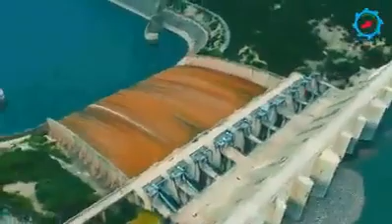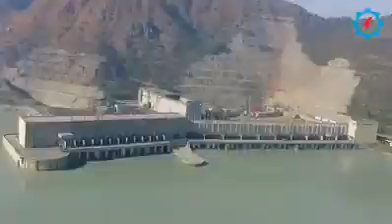Dam significance is imperative for the prosperity of Pakistan and to fulfill the water requirements for agriculture and power. Tarbela and Mangla multi-purpose mega projects sustain Pakistan's agriculture economy by supplementing and regulating irrigation supplies and providing cheap energy to the country. Since Pakistan has started the construction of Mohmand Dam and announced to commence the Diamer Basha Dam, on completion, thousands of megawatts and millions of acre-feet of water storage will be available.

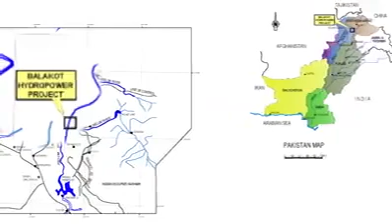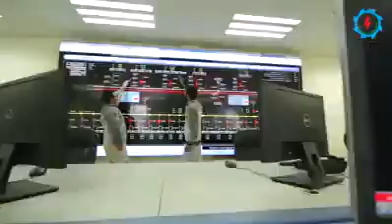However, the cascading hydropower projects are also playing a vital role to mitigate the shortfall of electricity in the country, and Balakot HPP is one of the cascading hydropower projects ready for construction. The 300 megawatt Balakot hydropower project is one of the series of hydropower projects on Kunhar River launched by Pakhtunkhwa Energy Development Organization, Government of Khyber Pakhtunkhwa. The objective of the proposed hydropower scheme is to generate and add cheap energy to the system in order to meet the current shortfall and increasing demand of electricity in the region through economical and sustainable means.

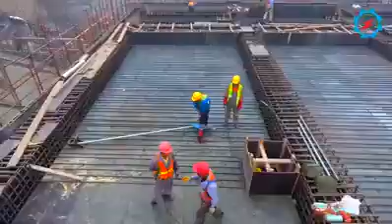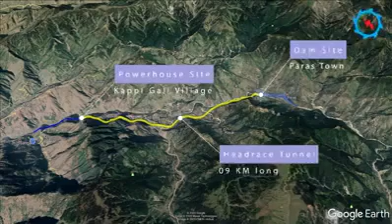Balakot hydropower project is located on the Kunhar River, about 18.6 kilometers upstream of the town of Balakot in KPK province. The project is expanded over 12 kilometers from Paras to Sangar village. The dam site will be located near the village of Paras, whereas the powerhouse site will be located 8 kilometers upstream of Balakot, near Kappi Gali village.

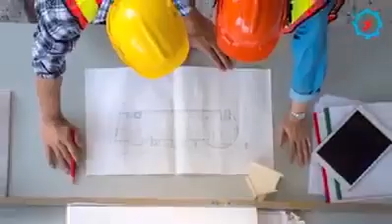The run-of-river scheme was originally identified under the Study Identification of Hydropower Potential in Kagan Valley by the Sarhad Hydel Development Organization, now called PEDO, with the technical collaboration of the German Agency for Technical Cooperation, GTZ. A feasibility study of the project was prepared in 2013 and updated recently by reputed consultants. The joint venture comprises Aqualogus from Portugal, Team Consultants and Zeeruk International from Pakistan. The consultants released a draft report of their findings in 2018. Hagler Bailly Pakistan Private Limited contributed to the environmental and social assessment of options for ensuring that the project meets the environmental and social safeguards.

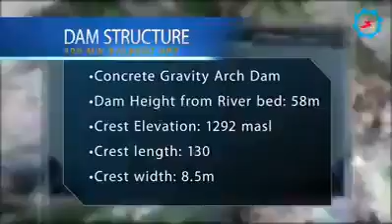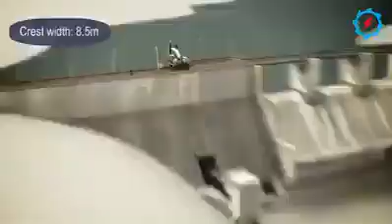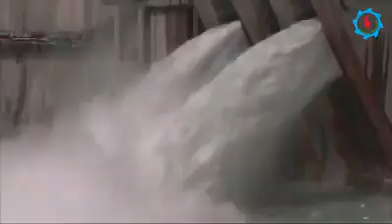The 58 meters high dam structure is concrete gravity with a curved axis in plan and a radius of 187 meters. The dam crest elevation is 1292 meters above sea level and the crest length is approximately 130 meters. A crest width of 8.5 meters is proposed to ensure adequate access for vehicles, cranes and other maintenance equipment. It has been designed to pass floods of 3,500 cubic meters per second, with an upper gated ogee crest spillway and a low-level gated spillway.

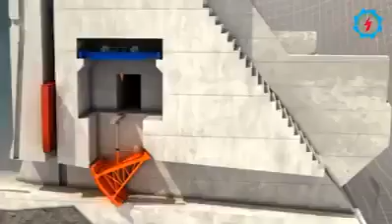This layout consists of 3 radial upper spillway gates, having an opening of 11 meter height and 10 meters width, as well as 2 low-level spillway sluice gates of 8 meter height and 6 meter width. The gates are hydraulically operated for flood discharge and are set at the crest level of 1,252.5 meters above sea level. The river diversion scheme consists of a right bank diversion tunnel which will be further converted to a sediment bypass tunnel, as well as additional openings in the dam body for the low-level spillway.

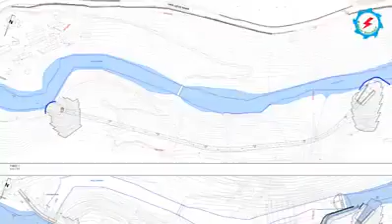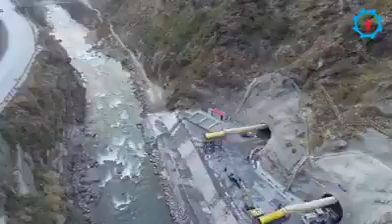The dam will create a 2.2 kilometer long reservoir with a gross storage of 3.6 million cubic meters at the maximum operation level, 1288 meters above sea level. The proposed reservoir falls mainly in the residential area of Paras town, starting from just downstream of the tailrace area of the under construction Suki Kinari hydropower project. During filling, hundreds of residential and commercial properties will submerge in the reservoir on the terrace deposits of Kunhar River.

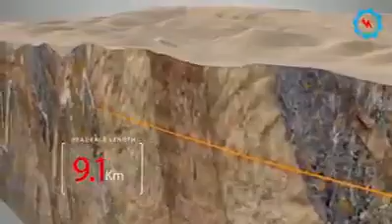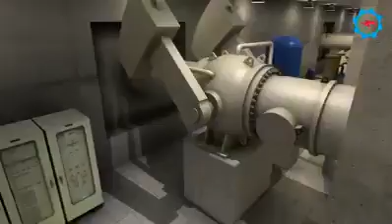The headrace tunnel extending 9 km will divert water from the reservoir created by the dam to the powerhouse. It is designed on the left bank of the Kunhar River, having an internal diameter of 8 meters, which will pass through highly tectonic zones in the Murree Formation. At the end of the headrace tunnel, a surge shaft is designed to mitigate the water hammering effect in case of sudden shutdown by closing the turbine valves. If no arrangement has been made to prevent this water hammering, it may result in bursting of the penstock pipe and may lead to serious stability issues.

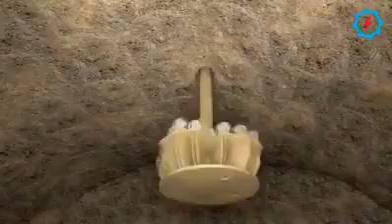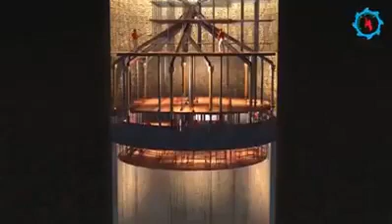The construction of the surge shaft is recommended by the raise boring method, and expansion of the shaft after raise boring is designed with the drill and blast method. Initially the pilot hole shall be drilled, then the reaming process shall follow from the bottom chamber, and in the end, expansion of the shaft and concrete lining will be made. The surge shaft is 122 meters high having an internal diameter of 14.5 meters; a steel lined pressure shaft having a length of 152 meters shall feed the powerhouse.

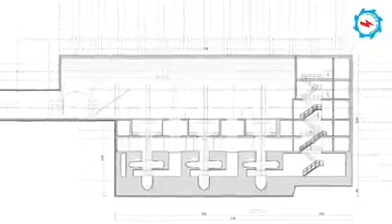The BHPP powerhouse is proposed on the left bank of Kunhar River near Kappi Gali village, under a rock cover of 230 meters. The underground powerhouse is composed of 2 conventional cavern structures, for 3 identical Francis units with vertical axis and for the power transformer and GIS equipment. The main hall of the underground powerhouse shall be 71 meters long, 20 meters wide and 34 meters high. The transformer cavern shall be 88 meters long, 14 meters wide and 15 meters high. The access tunnel is arranged for the main powerhouse and transformer hall. During construction it would be used for excavation activities and during operation for access of O&M personnel.

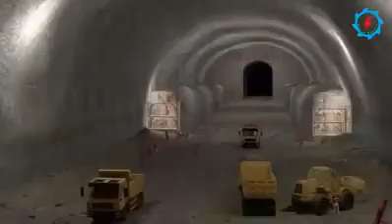The Balakot hydropower project caverns would be constructed as multi-story structures like other underground complexes. The excavation is recommended with the conventional drill and blast method. The excavations of underground caverns shall be done layer-wise with controlled blasting. A 1.6 km long tailrace tunnel having an internal diameter of 8 meters is designed to drop the water into Kunhar River after feeding the turbines. The living facilities necessary during construction and for operation and maintenance, temporary and permanent staff residential colony, would be constructed with all allied structures such as office building, rest house and staff houses.

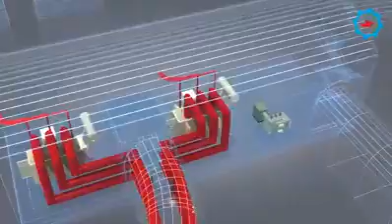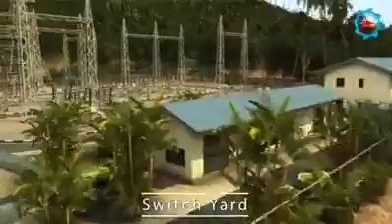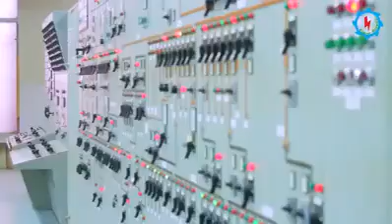The exterior switchyard is arranged on the banks of the river, near the powerhouse access tunnel, from where power will be evacuated to the national grid. Out of 3 generating units, 2 will be connected to the 500 kV grid, and 1 unit will be connected to the 132 kV grid to supply the local grid of the Balakot area. The project will provide 1,250 GWh average annual energy to the system. It is expected that construction will commence very soon, as the Pakhtunkhwa Energy Development Organization, with the collaboration of Asian Development Bank for financing the $645 million, has already initiated the bid process for the selection of consultants and the main contractor to implement design, supply and installation, testing and commissioning of Balakot hydropower project. The construction period of the project is 75 months.